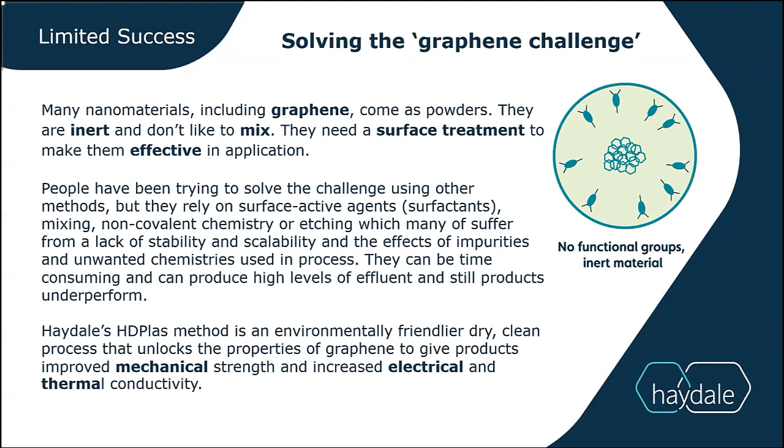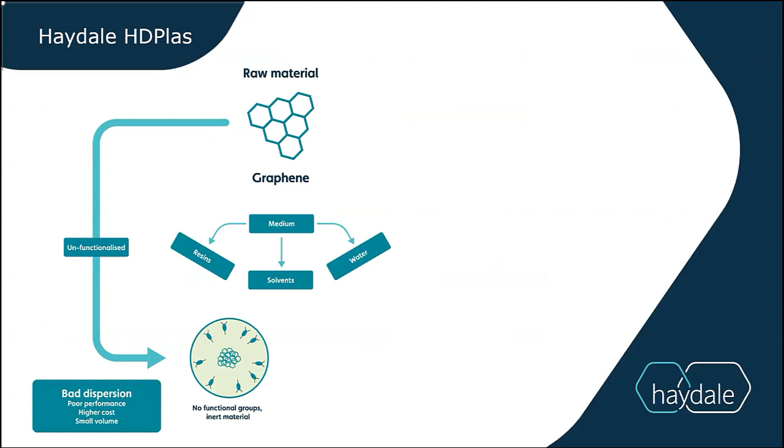As shown in this diagram, when unfunctionalized graphene or other raw materials are dispersed into a matrix, such as a resin, solvent, or water, there is no compatibility with the nanomaterial. This results in bad dispersion and matrix interaction, resulting in poor performance.

Whereas, if we can functionalize the material, we will see the correct compatibility with the formulation and interaction with the matrix. Haydale's approach to functionalization has been to utilize plasma as the means of covalently bonding the surface chemistry to graphene and other advanced materials.

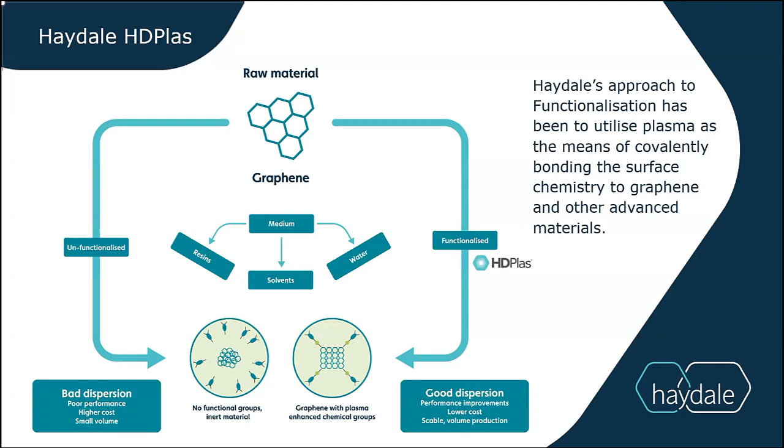Why plasma, though? Well, plasma is already widely used in industry for metallurgy, semiconductors, cutting, welding, and cleaning. In automotive and printing applications, plasma is known for its ultrafine cleaning, removal of weak boundary layers, modification of the surface topography, cross-linking of the surface molecules and reduction of metal oxides, and most importantly, deposition of functional groups.

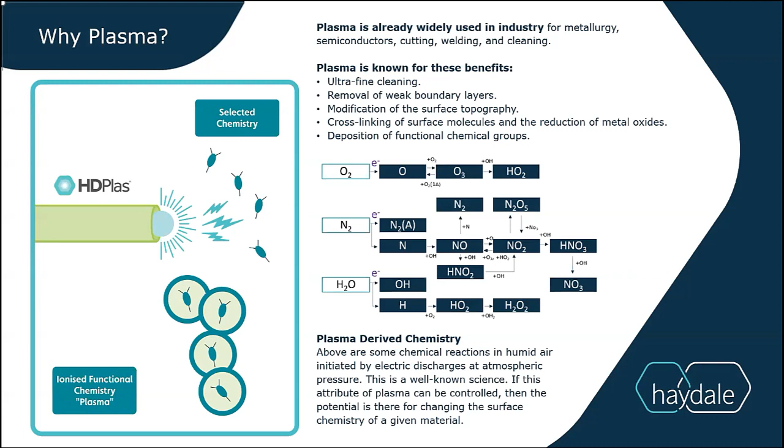The matrix in the center of the slide shows some of the chemical reactions by plasma in a damp atmosphere. These attributes of plasma are well known, and if they can be controlled and applied to a nanomaterial, then there's the potential for improving the surface chemistry of this given material. These benefits and more are what makes Haydale's approach truly unique.

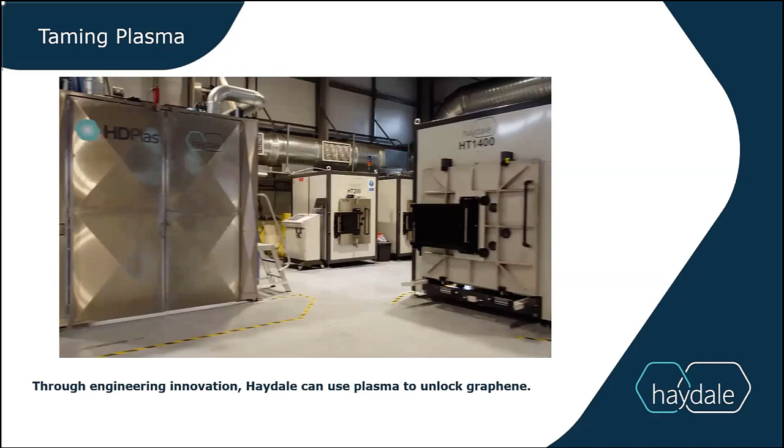So being able to plasma functionalize graphene, let alone a more traditional material, has been an immense engineering challenge. Haydale has been able to develop, validate, and scale our HDPlas process through our fleet of patented plasma reactors, providing the level of tunability and control to support our customer needs and our own product offering.

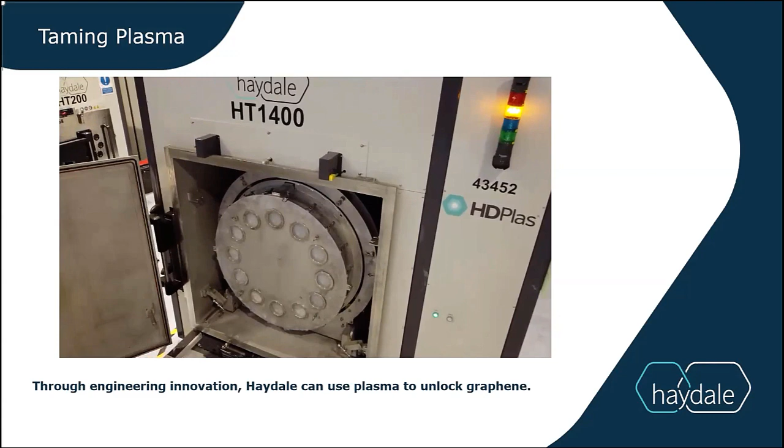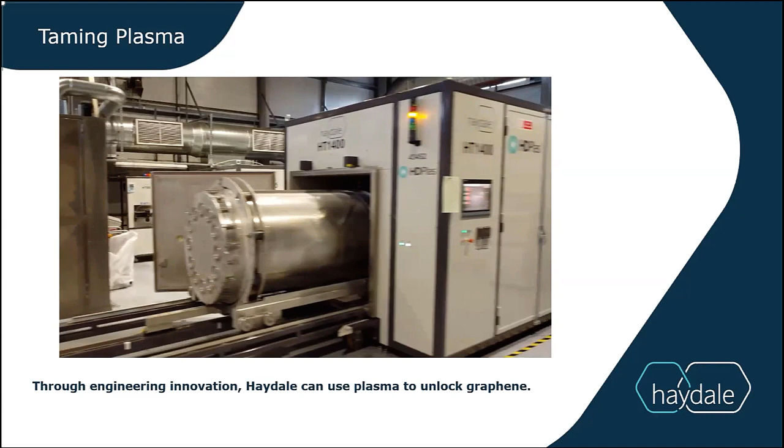Now, we've got 3 key points to combat the graphene challenge: plasma functionalization, advanced materials, and a means to combine them in our reactors. So, bringing it back to our initial slide, graphene is inert and won't disperse.

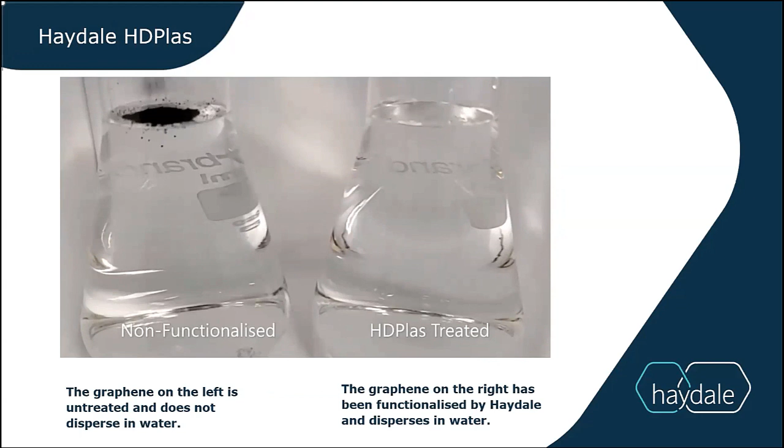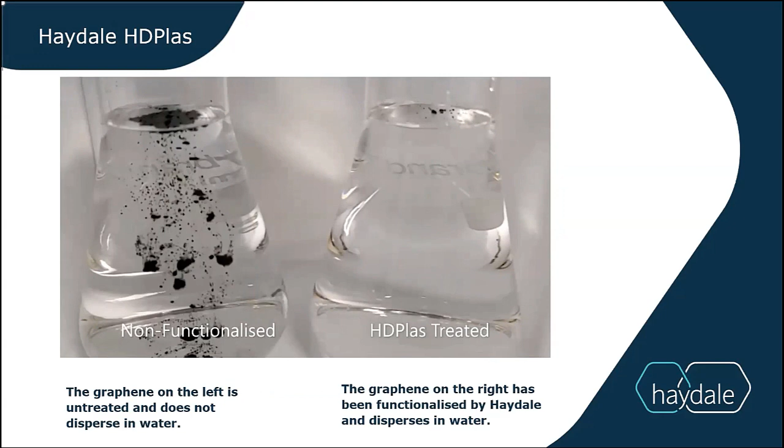The vial on the left demonstrates the graphene challenge well. Industry has been working with this, overcoming it either with high loading, additives such as surfactants, high shear mixing, and other methods.

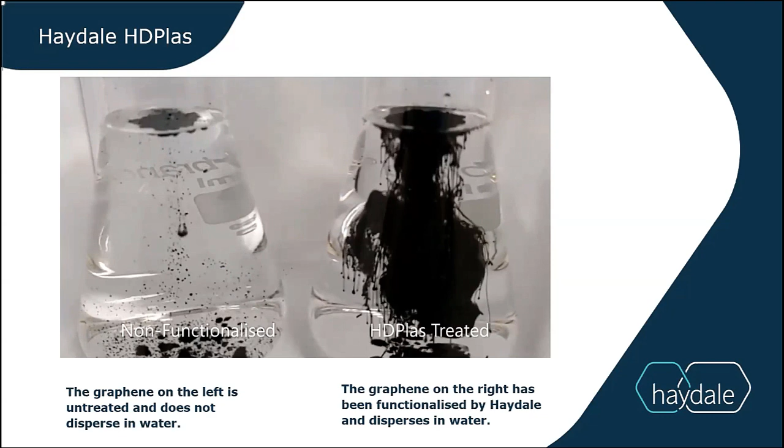These all increase costs in manufacturing and impact on quality. On the right is the same material, same amount, treated with our HT60 lab scale reactor. This is less power than a kettle.

This is the required functional groups that want to interact with the matrix, thus the property of graphene is unlocked. We don't only improve dispersion, but we can add specific functional groups that change the property of the material, adding additional benefit to the end product.

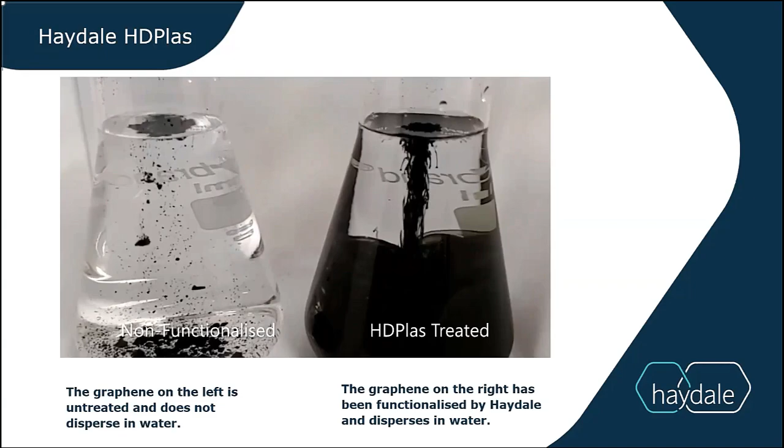So Haydale is not just a functionalized powder supplier. The graphene challenge requires more of a wider scope of understanding.

Haydale provides end-to-end support to deliver our customer product uplift requirements, a holistic approach if you will. We always first start with what the requirements are from the customer, not what graphene can do, but instead what is the need.

Often we have an off-the-shelf solution for the customer from a range of existing products. Once the customer requirement is assessed for volume, measures of success, the manufacturing process, costs, scalability, and time scale, then we can work through these variables here.

We can choose the right material. Haydale does not make graphene. We've got hundreds of grades we've assessed, but we also use carbon nanotubes, boron nitride, and other materials. We're agnostic to whatever provides the benefit to the customer.

We can then choose the chemistry: oxidative, carboxylic, amines, silanes, hydrophobic, hydrophilic, depending on the need. We can tune the level of chemistry. That's key because too much functionality can alter the formulation or mask the properties of graphene that you're trying to provide.

They go into our plasma reactors. It's a single stage, high volume, worldwide patent protected, environmentally friendly process, but we don't stop there.

We take the powders and we can put them into an intermediate. We've got our own manufacturing facility here in the UK for that. That means we can provide it in a master batch, resins, solvents, or we can even make finished goods such as inks that complement the customer's requirement.

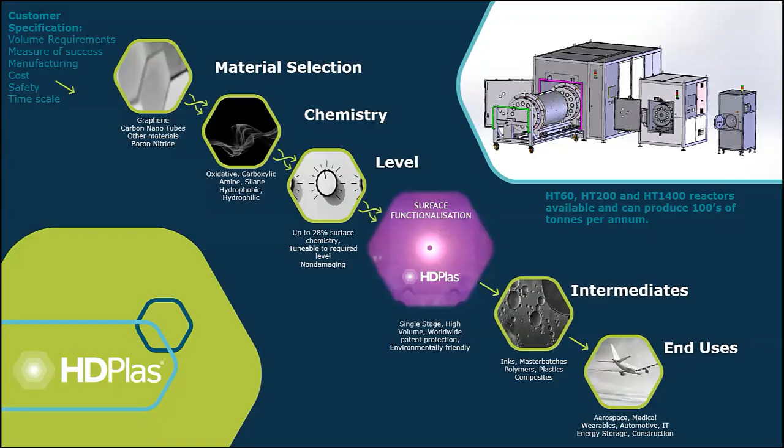Being able to provide the end-to-end solution for a vast range of applications requires tunability. By taming the chemical reactions that occur in plasma, Haydale has been able to tune in the types of chemistries and levels. This is not just by changing the feedstock chemistry, i.e. switching out oxygen for nitrogen,

Haydale can then take the bespoke powder and disperse it into a matrix that the customer can deal with, such as a master batch, or even produce a finished product, such as a printable conductive ink.

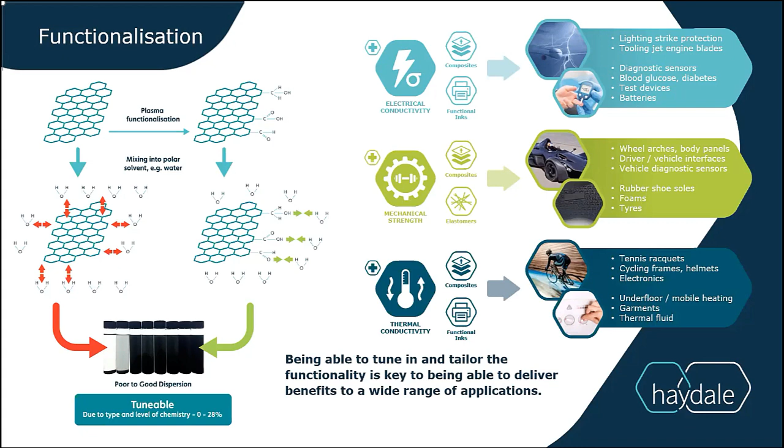We're applying these to a vast range of product applications driven by customer demand, such as lightning strike protection for aircraft, tooling for jet engine blades, diagnostic sensors, blood glucose diabetes test devices, batteries, automotive wheel arches and body panels, elastomers, shoes, foams, tires, sports equipment, cycling frames, electronics, underfloor heating, garments, and thermal fluid.

Haydale has a number of off-the-shelf printed biomedical sensors that utilize our functionalized graphene. Haydale's biomedical inks present the next generation of solutions for monitoring chronic conditions such as diabetes and detecting other medical conditions. Functionalized graphene also provides improved accuracy, flexibility, and speed to patient tests.

This is an award-winning product for microRNA detection in kidney disease, and it's also been shortlisted for the Engineer C2I Awards 2023. Functionalization has been very, very key to our biomedical sensors.

Through functionalization, we've been able to improve the dispersion and homogeneity, as you saw in that first video. That results in improved testing consistency. We're also able to select the right chemistry and the purity of that chemistry that helps with the sensor read rate and accuracy. But also very important is this new material, new functionality can't affect the manufacturing of this product.

So printability is key. We don't want to see increased viscosity. That means it can't be manufactured through traditional printing methods. And also it can't affect the cure profile at the end.

Another case study is our heater products. Haydale has unlocked the properties, electrical and thermal properties of graphene using our plasma functionalization in a range of conductive heater inks. These have been used in wearable functional garments in Tokyo by a medal-winning athlete, but these heaters can be printed into different shapes and sizes and are compatible with all modern construction materials.

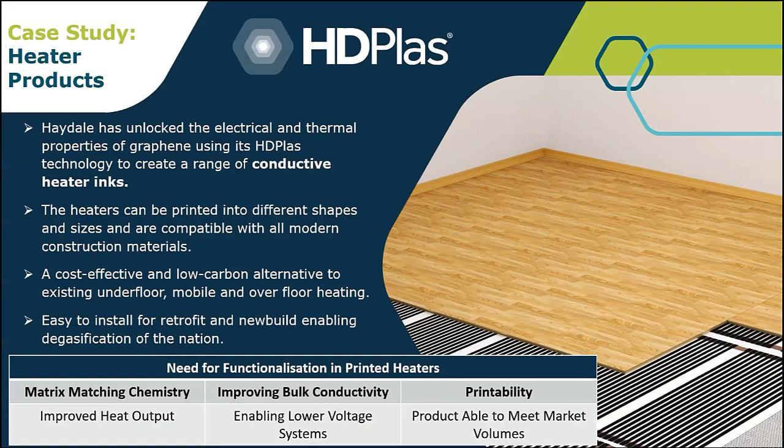And printability, again, is key for this one as well, allowing our product to meet the volume market demands. As you can imagine, with the current climate, being able to produce very, very, very efficient heating systems is going to be key, but you've also got to be able to do that in volume.

Elastomers and bike tires. Haydale and Italian bike tire manufacturer, Vittoria, have co-developed improved rubber compounds for better tire performance using functionalized graphene. Functionalization offers substantial improvements in grip, rolling resistance, puncture resistance, and durability.

This product has been developed through an iterative process where we've identified the right grades of materials, as you've seen throughout flowchart, and a number of functionalities, tuning them in to the right type of chemical groups and level to provide the benefit to the customer in their specific elastomer formula.

The functionalization needs to be able to complement vulcanization, so to ensure the product finish, and again, manufacturability. Mechanical requirements, we've got to get the functionality to get the interaction with the matrix, to get the better performance and long-term, longer product use life.

But also this needs to maintain or improve shelf life. You can't have it affecting the properties of the elastomer, then being detrimental to the shelf life of the product.

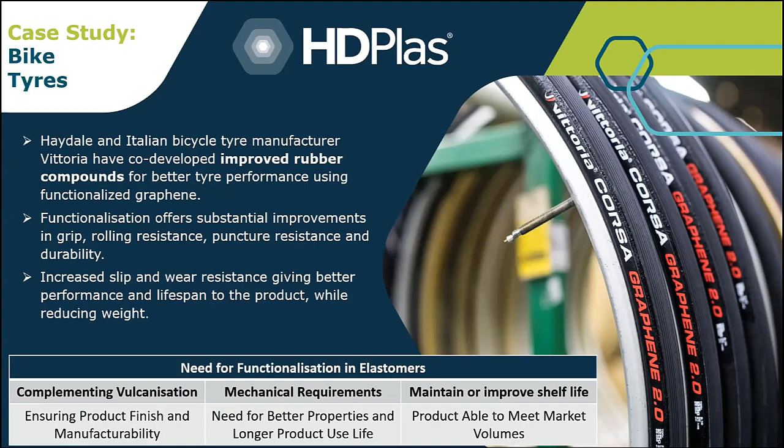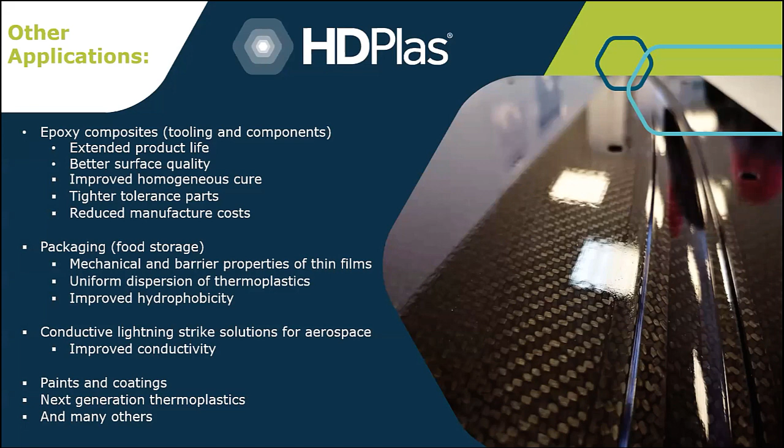We are focused on commercializing a few key of our own products, although we're able to support many customer requirements and manufacturing needs.

Through surface engineered functionalized nanomaterials, Haydale is further enhancing the world we live in. At Haydale, we have the capability to functionalize a range of nanomaterials to realize the customer's requirements, take those nanomaterials, work with our in-house experts to formulate and develop the manufacturing requirements against the customer's requirements, supporting innovative products and volume manufacturing. We provide the end-to-end solution to give graphene the power to change lives.

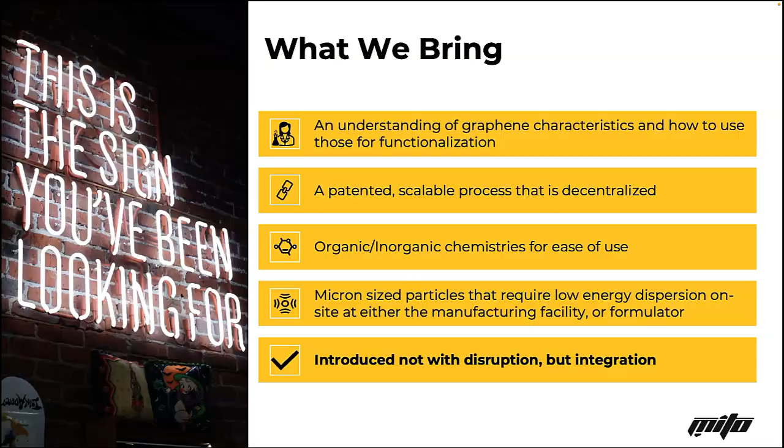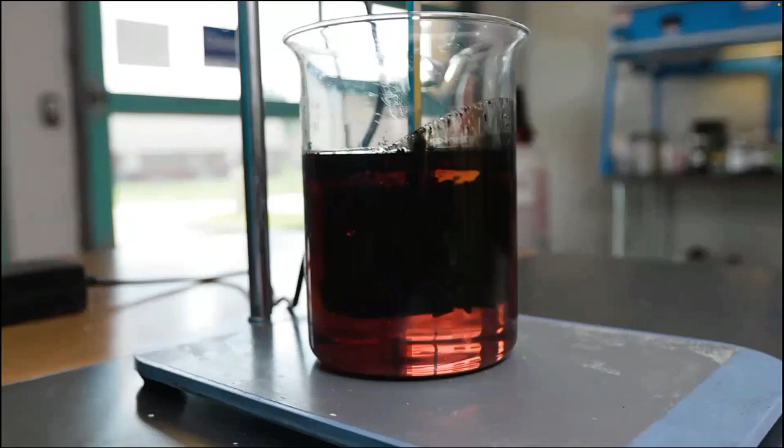The micron-sized particles require low energy dispersion, so we don't have to do ultrasonication—it's a very easy mixing solution where we can just go in with a drill and paint mixer and integrate, because everything we bring to the table is introduced not with disruption, but with integration. For instance, one of our flagship products is a graphene oxide-based particle, where with a 0.1% by weight mix of the resin, we weigh it out, put it into the system, and it's just an easy shear mix to where it reactively disperses throughout.

We've done this with thermosets and thermoplastics, and when you cast it, what you see under an optical microscope at 40x is that it is dispersed. These black particles are more stacked layers, but they still have that chemical functionality to better increase the surface interaction you really want from these nanomaterials. Whenever people sonicate, trying to get that very homogeneous dispersion, what they're really trying to do is create that flat monolayer content so the polymer can better adhere to it. Why not do that with chemistry?

Everything we do here is very compatible, easy to integrate, handling, integration, multiple delivery methods, so we can come to you with one product that you can plug into different steps along the way.

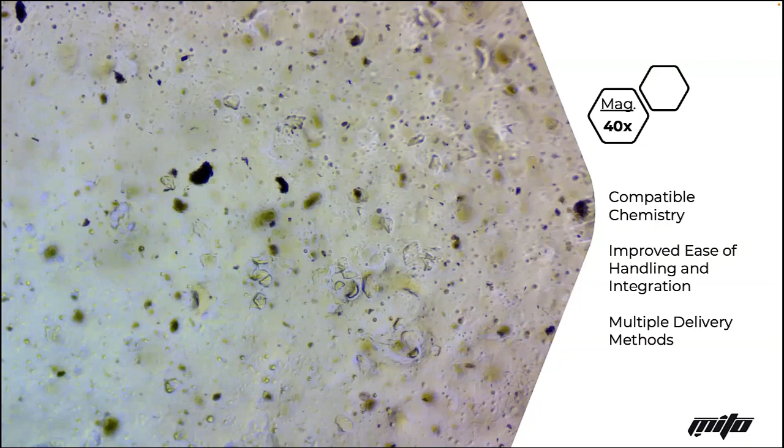For instance, our first public customer is Folsom Custom Skis. Last year they were trialing with our product, and what they found is that with 1%—10 grams for the whole set of skis—they were able to increase strength by 35% and damping properties anywhere between 100 and 200%, depending on the fiber. This got them really excited because they could never find a graphene supplier that would sell them less than 300 kilos of the stuff, and even then it was nanomaterials he didn't want to handle, so he just put it on the back burner.

But with this product, they went back to the drawing board, and what they found is that they were able to decrease the weight of the ski by 18%. They were able to save ultra-high molecular weight polyethylene, carbon fiber, wood, and steel just with this 10 grams of product. So they were able to make an ultralight ski that is still worth something. It doesn't chatter. You can still control it. It's a really nice ride.

And this is important because skis undergo a lot of flex, tension, and compression, and almost anything in the world that uses composites is undergoing that. So it's still a good proof point to then shop out to, say, automotive, transportation, or aerospace.

Another use case, hopefully going public soon, is a fishing rod manufacturer, a highly engineered American rod manufacturer over in Wisconsin. They make about 500,000 units a year. Coincidentally, their lead engineer designed a fly fishing rod for a buddy of his, and it won International Rod of the Year. So they are incorporating our product into that rod that they are designing.

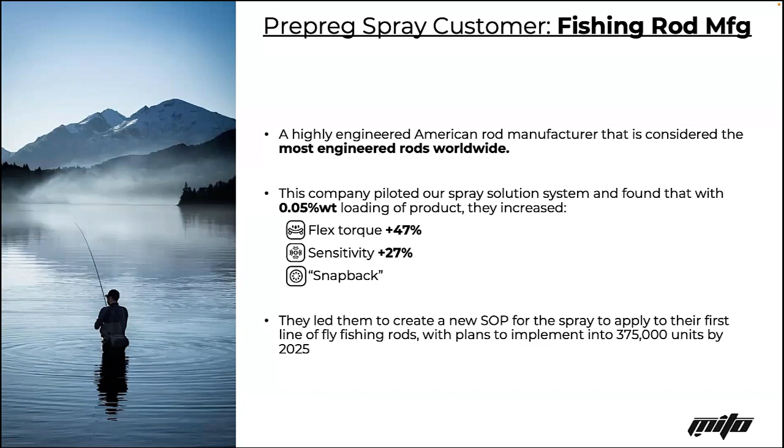So right now they're incorporating this product into about one fifth of their product line, and they should be going into about 375,000 units in the next 12 to 18 months.

Another use case, this prepreg customer, is a golf club head manufacturer, one of the top 5 club manufacturers in the world. They've always wanted to use graphene, but nothing has really worked—nanotubes, graphene oxide, nothing's really stuck. So we worked with their contract manufacturers. We made a unidirectional carbon fiber prepreg made on site. They took the powder, put it into the resin, put it through their hot melt system, and made prepreg with some Toray T700 fiber.

What they found is that with 0.5% by weight, the product increased flex strength and modulus by 20%, as well as stiffness by 15%. This allowed them to go back to the drawing board and use less carbon fiber and less resin, which allowed them to redistribute that weight and also save some greenhouse footprint, because carbon fiber is one of the most greenhouse intensive products in the world. That's 10% of the weight, so if you're taking out 10% of that, you're saving 10% of your greenhouse emissions.

Still with the same product, you're able to go into more thermoplastics, more thermosets, vinyl esters, polyesters. We've seen with this one product, one functionality, tuning the loading, you're able to get vinyl ester performance increases upwards of 85% in the compressive direction, as well as polypropylene performance increases of 20% without fiber. I mention without fiber because generally we've seen that with this chemistry we've developed, paired with this inorganic scaffold, it favors fiber adhesion. So you're not only increasing the surface interaction of the particle to the polymer, but also increasing the adhesion between the fiber and the substrate. That's what I mean by multifunctionality.